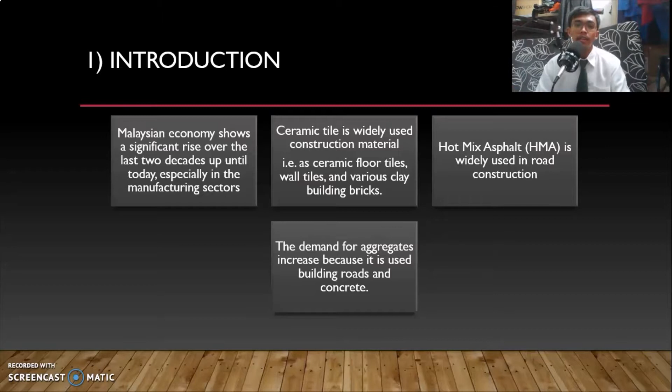We also need to know about hot mix asphalt, which is the mixture of aggregates and bitumen. HMA is widely used in road construction. The demand for aggregates increased because it is used in building roads and concrete. The problem is disposing of waste ceramic tile to landfills requires a lot of money from manufacturing companies. This is because the waste tiles need to undergo a crushing procedure, which is normally expensive and really challenging for companies.

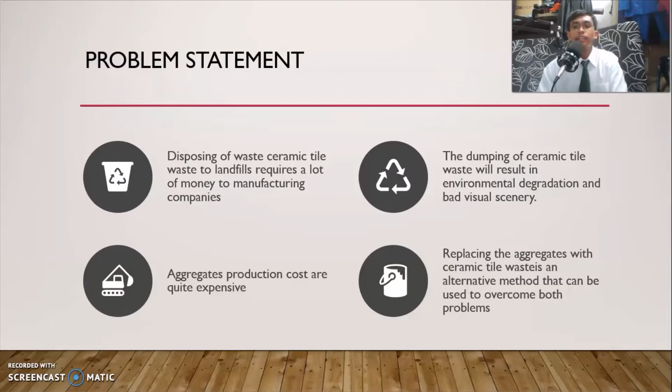Next, the dumping of ceramic tile waste will result in environmental degradation and bad visual scenery. Normally, tiles will not be decomposed at all, or it takes more than 10,000 years for the tiles to decompose at the landfill. Therefore, it will result in bad visual scenery. Next, aggregates production costs are quite expensive. So, replacing the aggregates with ceramic tile waste is an alternative method that can be used to overcome both problems.

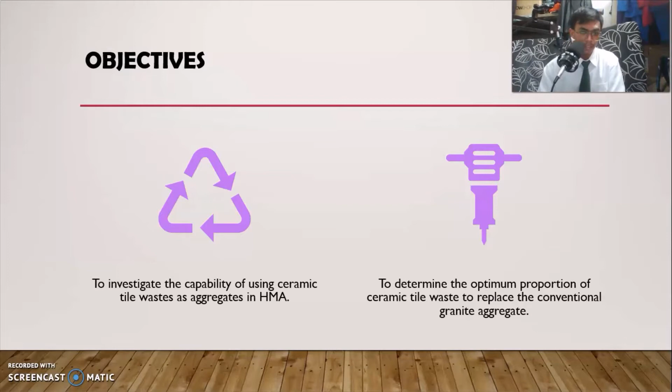So here comes the objective of my study. The objective is to investigate the capability of using ceramic tile waste as aggregates in hot mix asphalt. I want to make sure whether ceramics is capable to replace aggregates in HMA or not. Second is to determine the optimum proportion of ceramic tile waste to replace the conventional granite aggregate. If the result shows a good capability of ceramic in replacing the granite aggregates, what is the best optimum proportion?

For the literature review, Dr. Muniandy and her team replaced the conventional granite aggregate with ceramic aggregate in proportions of 0% up to 100% weight of aggregates with increments of 20%. They conducted material testing, Marshall stability and flow test, and also resilient modulus test. From the tests conducted, they concluded that 20% of ceramic waste in HMA improves up to 80% stability value and has lower optimum binder content compared to the control samples.

From the result, it shows that 100% ceramic waste in hot mix asphalt decreases the stability very much compared to control samples. Therefore, it is not recommended to use 100% ceramic waste in the hot mix asphalt. 20% shows the best performance in their study.

For Kara and her team, they replaced the granite aggregate with ceramic aggregate in proportions of 0% up to 40% weight of aggregates with increments of 10%. They conducted Marshall stability and flow tests, repeated dynamic loading creep tests, and fuzzy logic. From the result, they concluded that when ceramic waste is present, wearing resistance improves up to 15.5% and freezing and thawing resistance improves up to 22.7%. They also concluded that 30% of ceramic waste aggregate by weight was lighter by 11% compared to the control sample.

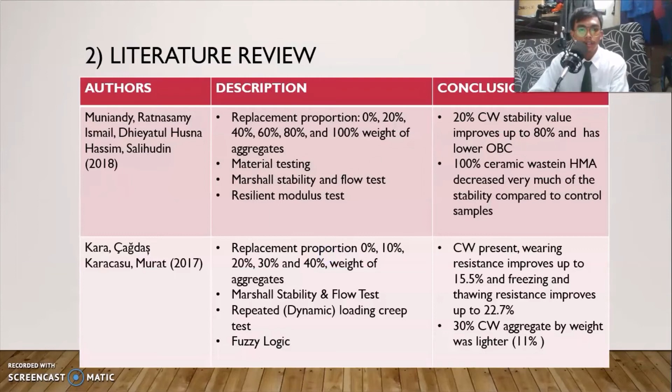Actually, Kara and her team started the research in 2015 with just Marshall stability and flow tests. Then in 2017, they added the fuzzy logic and repeated dynamic loading creep. The conclusion made is the same in 2015 and 2017. From Kara's study, it shows that replacing the conventional granite aggregate with 30% of ceramic waste is the best, while in Muniandy's study, replacing granite aggregate with 20% of the ceramic aggregate is the best.

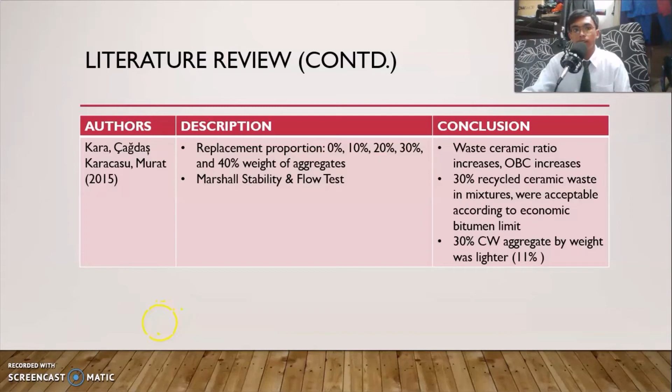So therefore, in my study, I will make the scope smaller by just replacing 15%, 20% and 25% of the granite aggregate with ceramic aggregates. I will conduct the Marshall stability and flow test and then compare it with the JKR spec. This is the flow chart of the methodology for FYP.

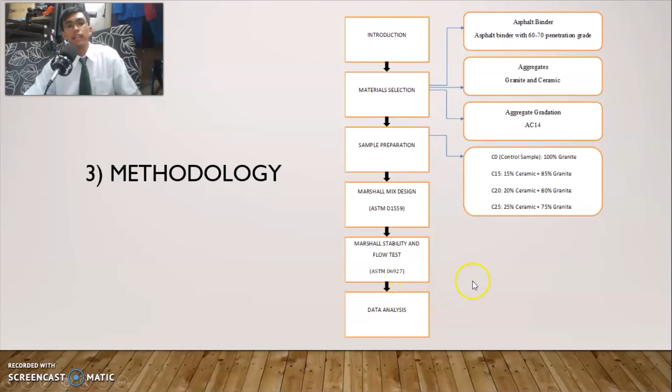It begins with the introduction, material selection, sample preparation, Marshall mix design, Marshall stability and flow test, and finally the data analysis. Mix design proportion: partial replacement of ceramic aggregates used in the design mix is 0%, 15%, 20% and 25% with 15 samples each. Since there are 4 mix designs, there will be 60 samples. The mix design method used in this study is Marshall mix design.

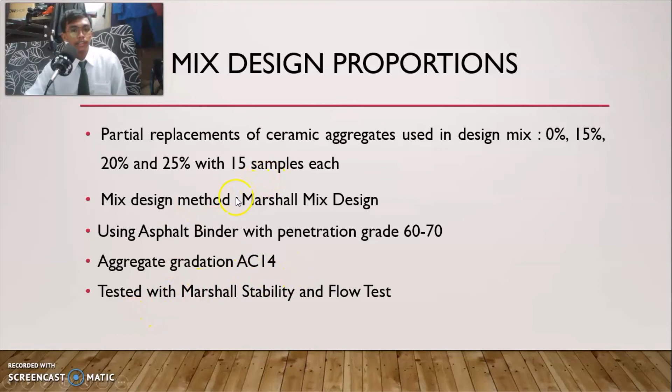I will be using asphalt binder with penetration grade 60-70 since it is readily available in the lab. I will do the aggregate gradation following AC14. Finally, all the 60 samples will be tested with the Marshall stability and flow test. The Marshall stability test is carried out by soaking and heating the AC14 mixture in a water bath at a temperature of 60 degrees Celsius for 30 minutes and then testing the mixture with Marshall equipment. The stability and flow will be determined.

Data obtained will be analyzed and 6 graphs need to be plotted to determine the OBC. The 6 graphs are density versus asphalt content, voids filled with asphalt VFA versus asphalt content, voids in total mix VTM versus asphalt content, stability versus asphalt content, flow versus asphalt content, and finally stiffness versus asphalt content. All 6 graphs will be plotted to determine the OBC.

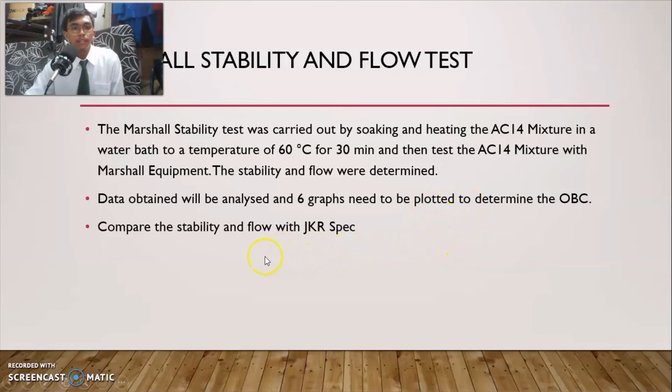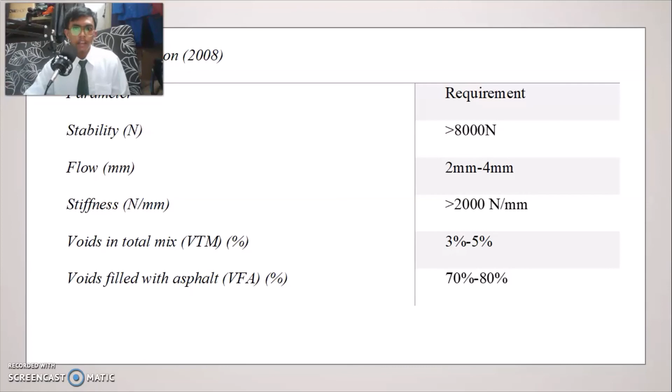Once OBC is determined, we will compare the stability and flow with the JKR spec. This is the JKR spec. We will see whether all the 4 mix designs meet the requirement of the JKR specification or not.

For the conclusion, in a nutshell, this study will use ceramic aggregates as a partial replacement for the virgin aggregate in the HMA. This approach will reduce the amount of waste from the ceramic tile industry going directly to the landfills. This alternative method of using the waste material in the HMA as aggregates can preserve the environment and reduce the consumption of natural resources and at the same time save a lot of money.